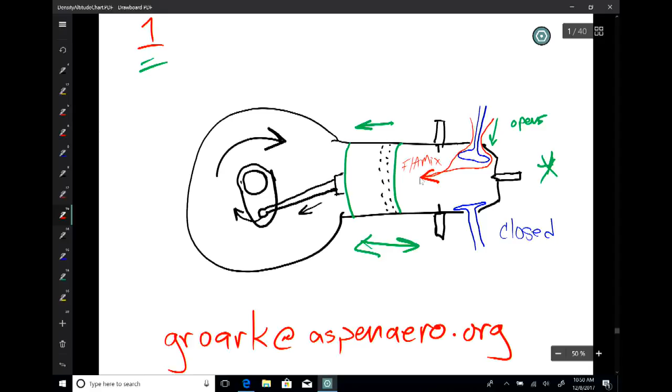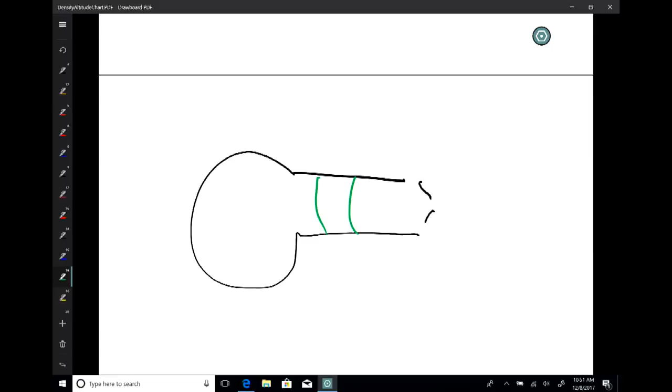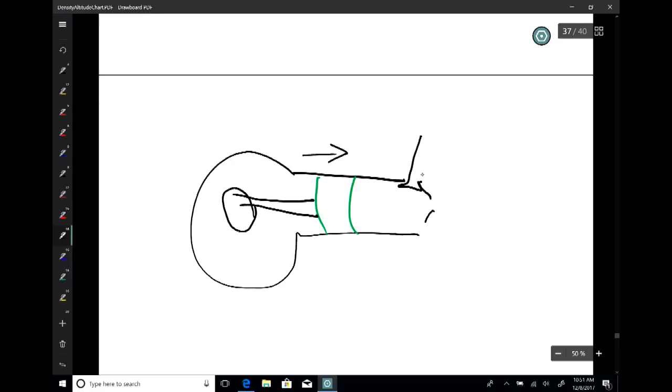So now explain to me what's going to happen on the second stroke. Compression. So with compression, what's happening? Which way is the piston moving? It's going up. And what's happening here with these valves now? They're both closed.

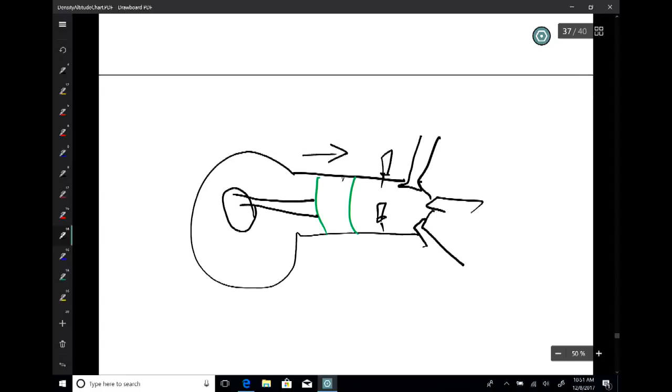Here's the spark plugs - so what's happening now? Why is it that we're squeezing this air and fuel together? Why do we do that, Solomon? Compression, resulting in an explosion to power the power plant. We don't call it an explosion - an explosion is something different. This is a controlled firing that happens.

However, the second phase here, this second stroke, is we're squeezing this together. Why? To create pressure. Why? Then it's easier to light. It pushes it more. Why? Let me ask you a question.

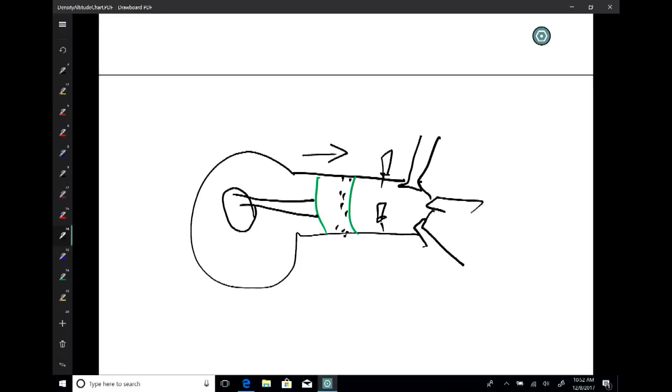You guys have all seen a firecracker, right? With a firecracker, it's wrapped with what? It's paper. So if you take that paper and unwrap everything, what's inside? Gunpowder - a little gunpowder. If you take that gunpowder and just put it on the table and I take a match and light it, is it going to go bang? No, because all the pressure has been released.

So you want to compress it so you get the right amount of combustion to turn the engine - boom. It's kind of like why you wrap a firecracker, because otherwise the gunpowder just burns and that's no fun. When you wrap it really tight and get all those molecules together, they all interact almost instantaneously as opposed to one at a time. One at a time you don't get much, but when they all work together, that's when you get the bang. So with this, squeezing the air and fuel together makes for a more efficient, controlled firing. Good so far.

So, the piston is going away from the crankcase, squeezing the air-fuel mixture. Valves are closed, spark plug is not sparking. What stroke is that? Compression, and it's number two.

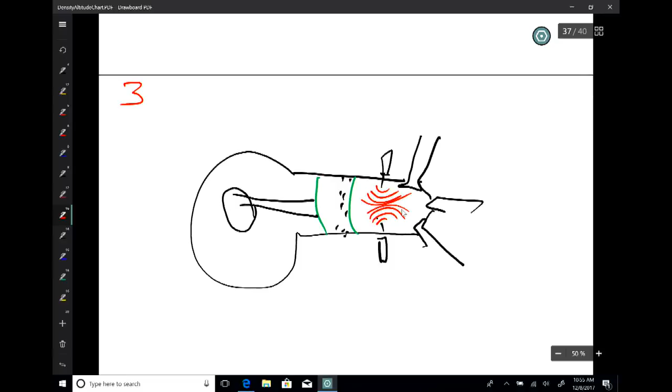Which direction is it? Toward the crankshaft, toward the crankcase. That is what turns the crankshaft - that is what turns your little spinny thingy out there at the front of your airplane.

Elijah asks: when the engine is running, does every single piston go down at the same time, or are they differential so they spin the other one? We're going to talk about that when we get all four of them. So we have a controlled firing - why do we have two spark plugs in this cylinder instead of one? Can't just one do the trick?

So that it burns evenly, the bone doctor suggests, which is good. By burning evenly, it burns more completely, and it creates a little more power than there would be if there were just one spark plug.

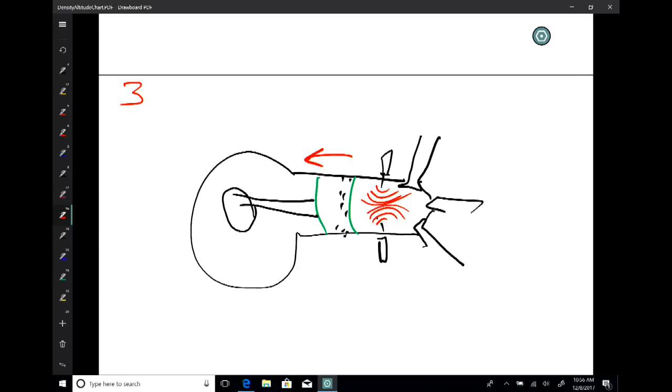The spark comes from something. It comes from electricity, a signal coming to those spark plugs. They're both on separate magneto systems. Separate magnetos send the timing of the spark to those two spark plugs at the same time. If you lose one magneto system, you're still going to get a firing in there, but it's not going to produce as much energy. It's not going to be as efficient, but it will keep your airplane running.

So why do we have two magneto systems sending the pulse to those two spark plugs? Elijah? Correct. Well, you're not going to crash anyway. You're going to land. It just may not be at an airport. So you're going to lose a little power, you're going to lose a little efficiency, but you're not going to lose the engine. Safety and performance. Those are the two reasons why you have dual magneto systems, and it's why you have two spark plugs there. Because of safety and performance.

Now, on to our fourth stroke.

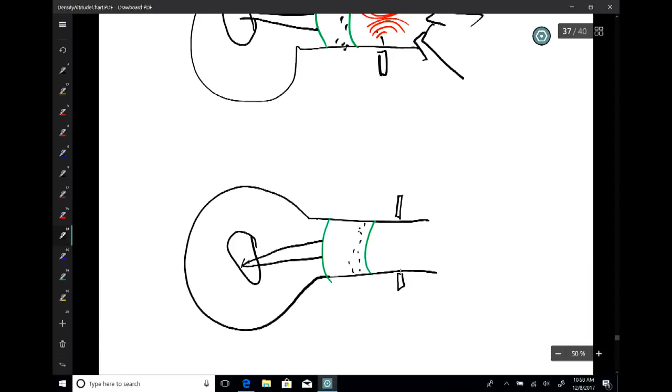What's happening with the intake valve now on our fourth stroke? Fourth stroke is called what? Exhaust. What's happening with our intake valve? It's going to be closed. What's happening with our exhaust valve? It's open. That's what's happening.

And the valve extends into the piston or combustion chamber. Well, whatever the word is. Okay, so that valve opens, and what's the direction of our piston? Up, away from the crankcase to the top of the cylinder. Because again, remember, these are laid out horizontally, so top and bottom is subjective. So it is moving away from the crankcase, moving up into the combustion chamber, pushing out what?

Exhaust. What is exhaust? What is that? What kind of gases? Not CO2, we breathe out CO2. What does an engine breathe out? That's CO2. Carbon monoxide, CO. It breathes out carbon monoxide, which is a byproduct of combustion anytime that you have this fire within an oxygenated system of some sort.

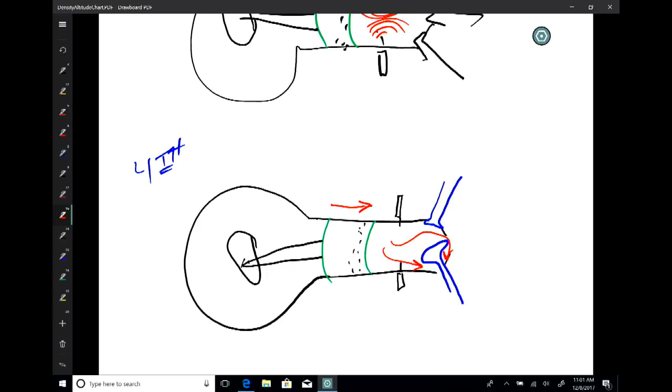How about heat? Okay, heat. So it pushes heat out. So you have the remnants of combustion: water vapor, carbon monoxide, maybe little pieces of carbon if you're not managing your fuel correctly, but if you're managing the amount of fuel that goes into your air-fuel mixture, it's a very clean process, cleaner than cars.

But heat also escapes. Anders, there's two things that we can use those escaping gases for. One of them that we already talked about: heat. How do you heat that airplane?

How do you heat the inside of that airplane? You turn on... Joseph? Isn't that kind of like how it works though? Anders, how do we heat this airplane? We pull a lever and we get warm air. Where does the warm air come from? The exhaust gases go through a tube, right?

The exhaust pipe. Surrounding the exhaust pipe is what? You've done the reading, correct? A case, something we called a manifold. That manifold is a hollow metal case. What does it collect? Heat. We can then, with a fan, pull that heat out of that manifold into the cabin.

Fuel injectors, explain. I will explain to you the difference between superchargers, turbochargers, and turbo normalizers. I will explain that, but I want you to read this so you know what I'm talking about.

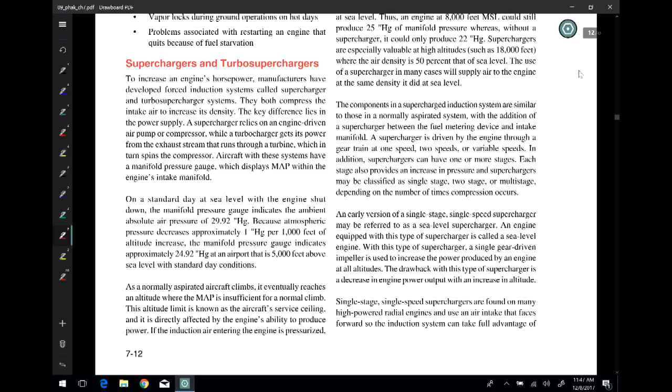Solomon? So what I have is propeller. We're not even done yet, buddy. So just keep writing. Ignition system. Joseph, in particular, be prepared to explain.

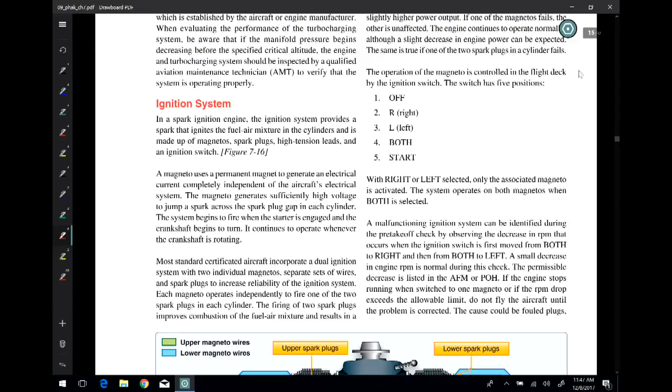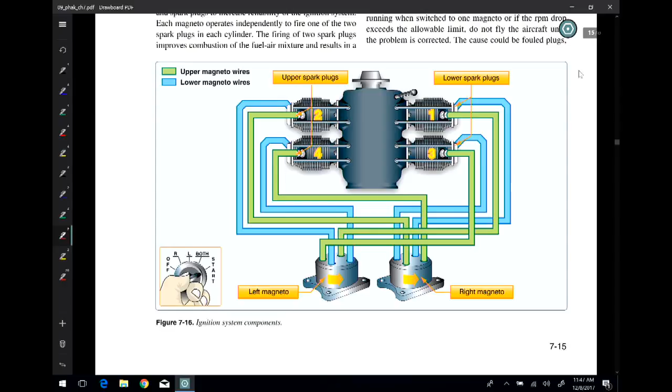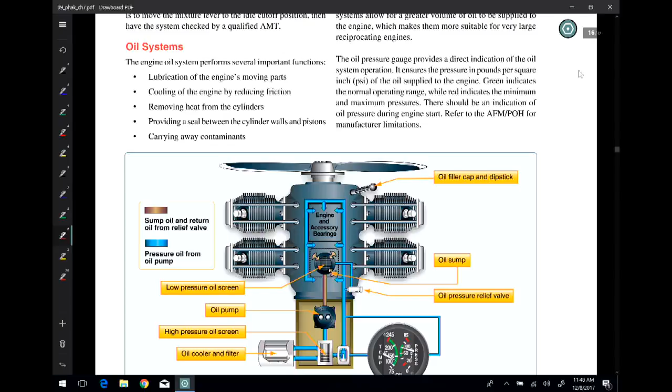Well, here we go. This will be your opportunity to dazzle us. Oil system, explain. Engine cooling systems, explain.

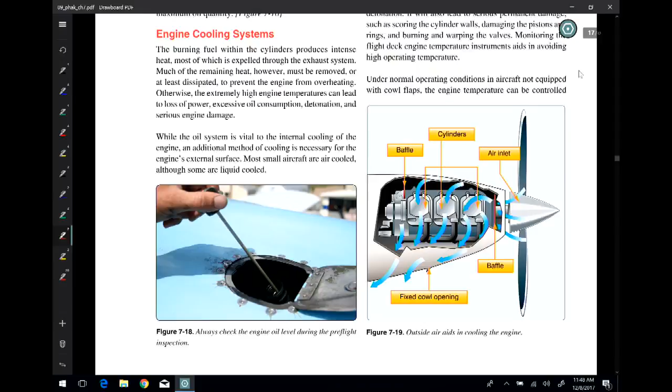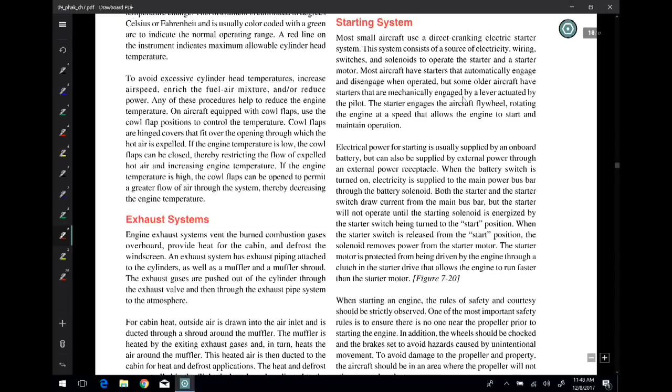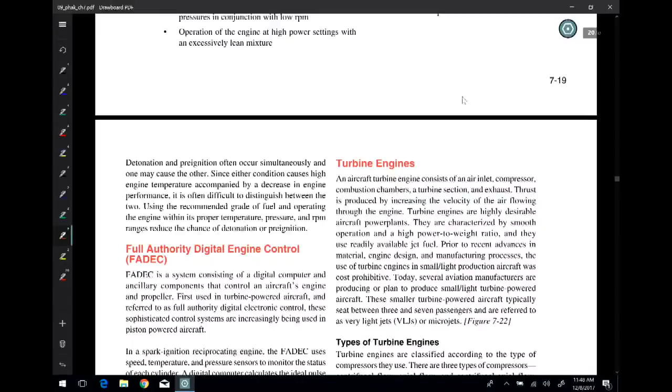I'm not going to ask you about the exhaust system because you already know. Starting systems, explain. I will walk you through electrical systems, but that won't happen until Thursday.

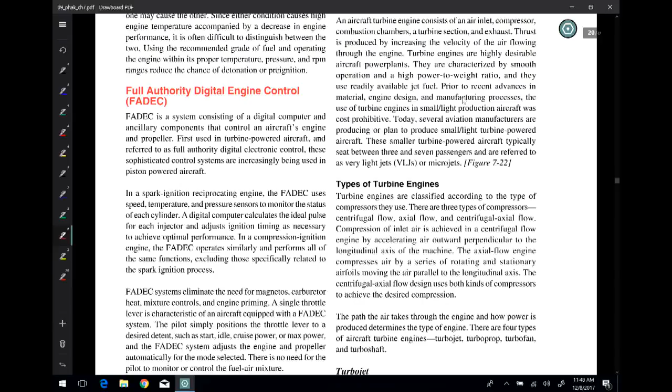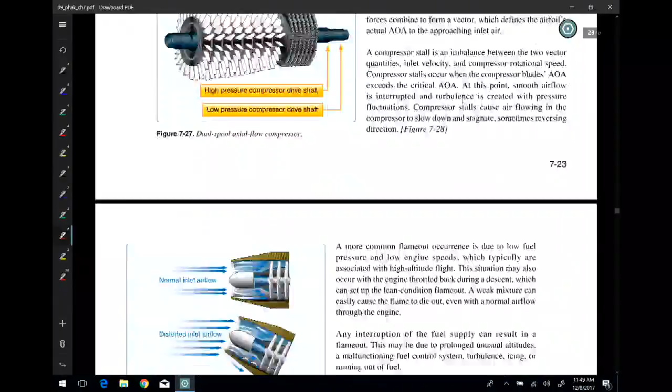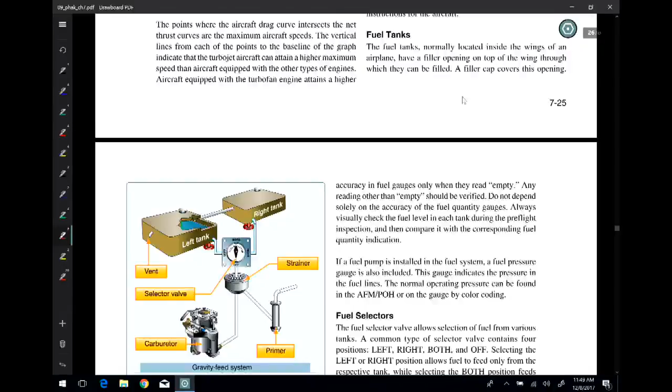I'm skipping the jet engines for now. We talked about the fuel system, explain.

Quickly here, those are the type of fuel options: red, green, and blue, 80 octane, 100 octane, 100 low lead, that I used to have back when I started flying. Now there's only one, 100 low lead. Plus, you have your Jet A.

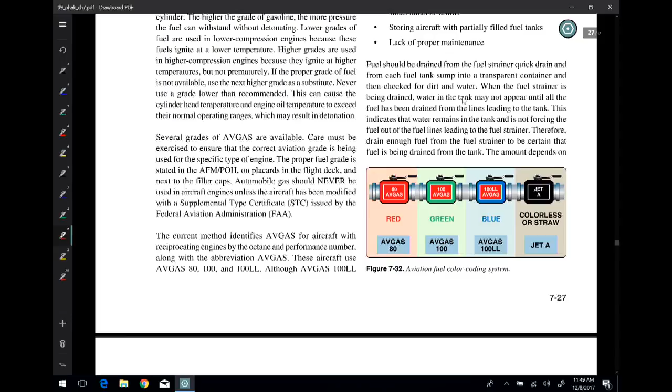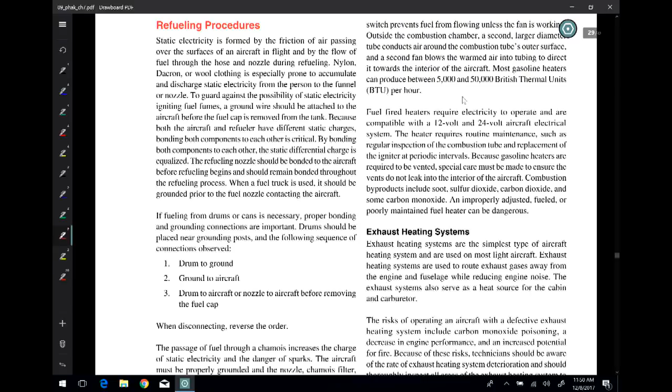Solomon: isn't lead pretty bad? Like, if it has low lead, doesn't that mean it still has lead in it? Correct. The lead additive is one of the things that the manufacturers want, as it helps lubricate the engine and systems. However, we're moving away from that.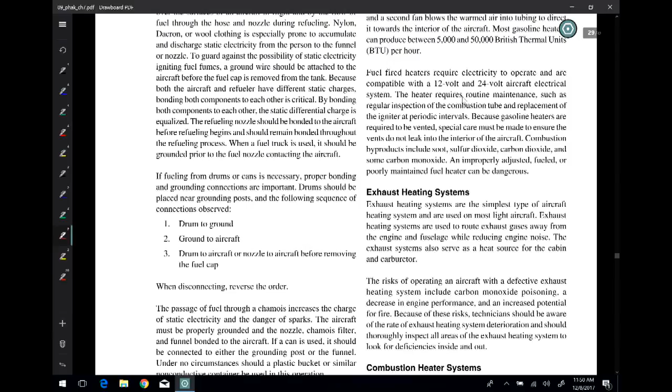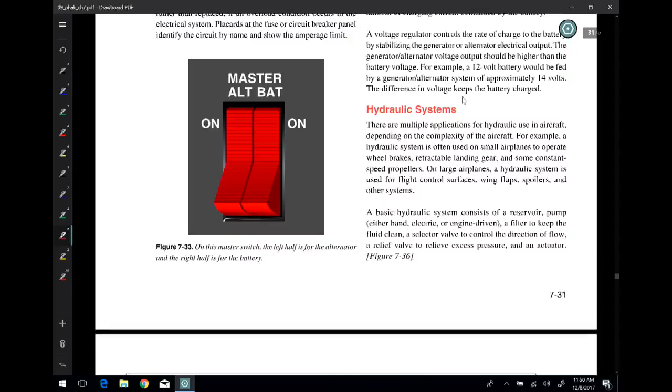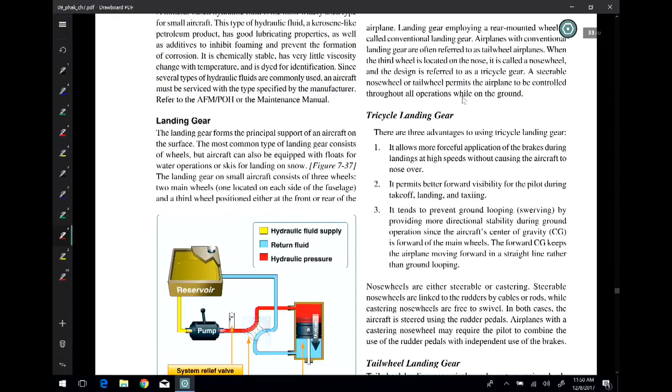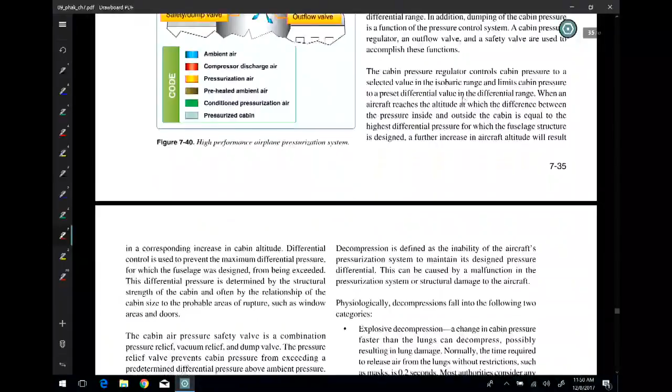Heating systems, we talked about. Electrical system, I will go over, but I want you to read the electrical component of this. Hydraulic systems, I will just touch on. Landing gear, know what types of landing gear there are. Know what it means to pressurize an airplane, the cabin.

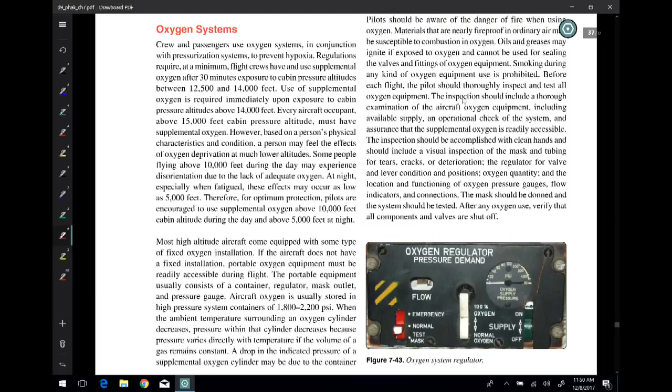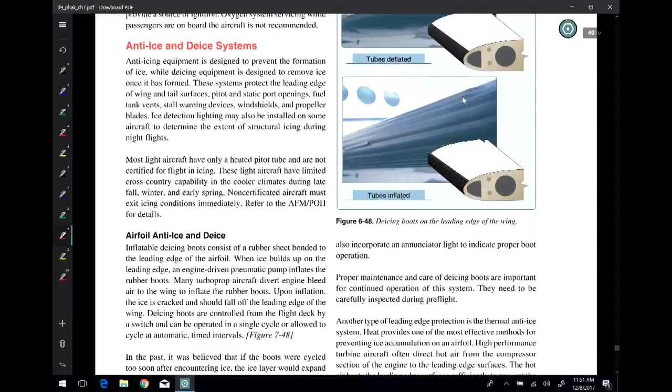Understand oxygen systems, explain. Anti-ice: how do we accumulate ice? Why is it bad, or is it bad? I don't know, it may be nice, it may be lovely. How do we keep ice from forming on the airplane?